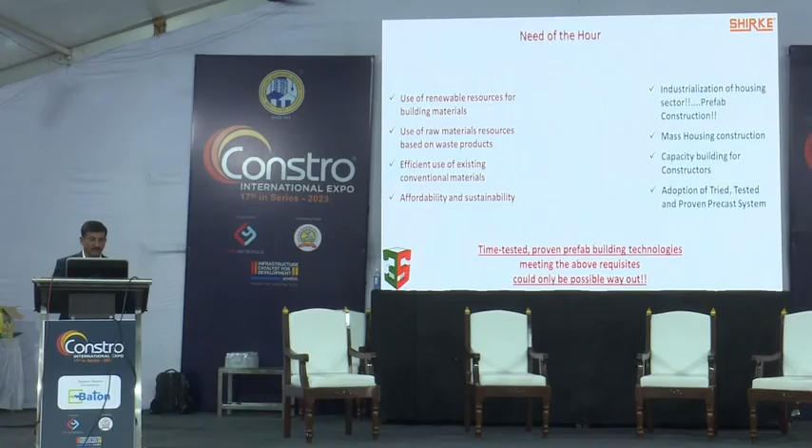What do we mean by prefab? It is something which is fabricated off-site and then assembled. Whereas in the precast scenario, we have something which is cast in molds and then taken to site. But we need to industrialize the housing sector when it comes to building construction. Mass housing is one such solution which will mitigate this particular shortage, and for that we need to do capacity building for our constructors and builders, so that we will be able to build maximum houses in this particular category in times to come.

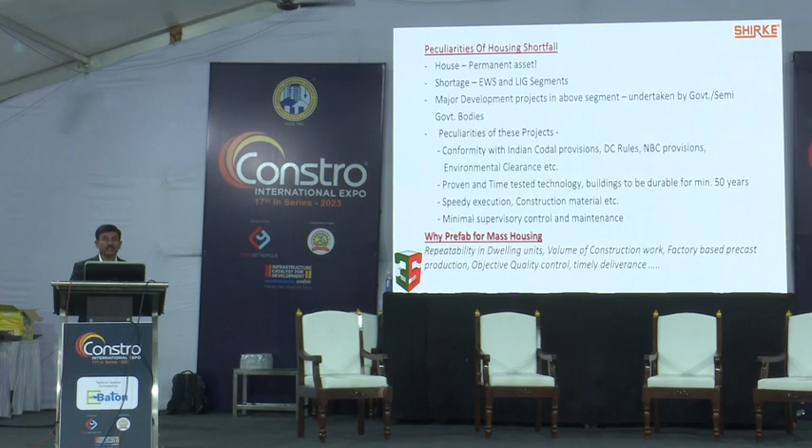House, as you know, is a permanent asset, and shortage lies predominantly in the EWS and LIG segments, based on precast manufacturing plants, objective quality controls in construction as well as precasting, and of course timely delivery. That brings me to the main question as to why precast, why not conventional construction? Yes, conventional construction does have its own importance, but when it comes to mitigating a shortage of 19 million houses in the shortest period of time, conventional construction won't help. We need some alternate technology. What is the alternate technology which is sustainable, tried, tested and proven in our context?

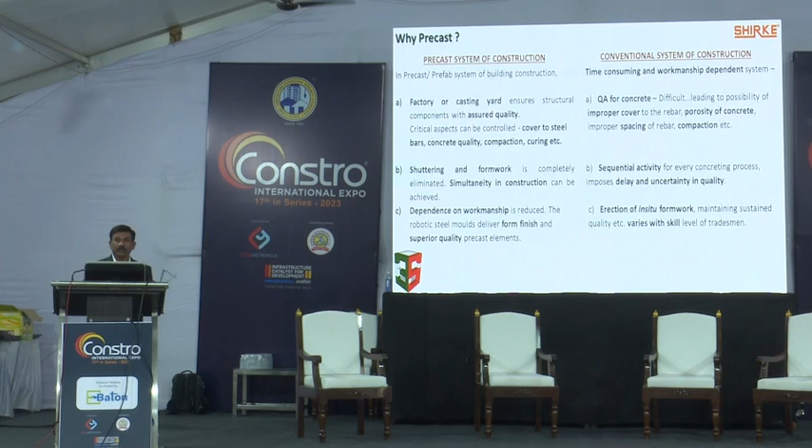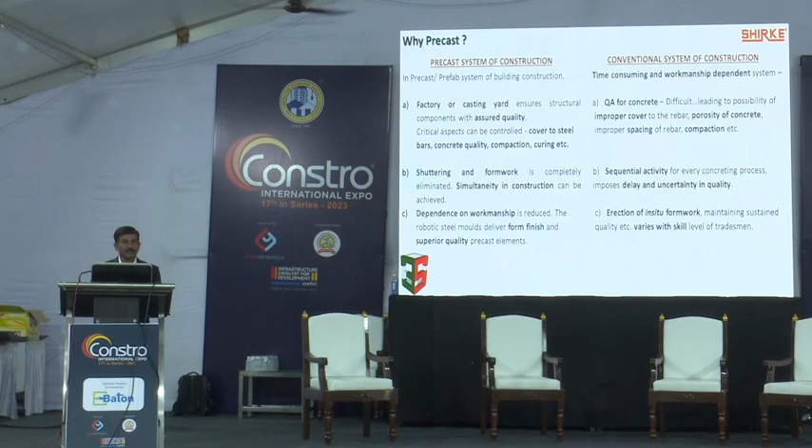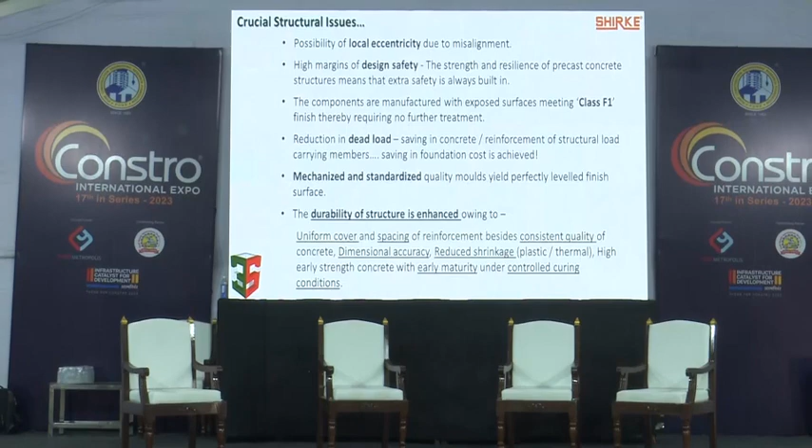It is prefab construction, wherein factory-based construction eliminates the dependence on human skills. Shuttering and formwork is entirely eliminated. Sequential activity as seen in conventional construction is eliminated. We can have the foundation started, and at the same time the casting of the superstructure can take place in the factories. These are some of the advantages: it reduces the entire structural load, makes the structure flexible, and behaves perfectly well in an earthquake scenario. Mechanized and standardized quality molds bring in objective quality controls.

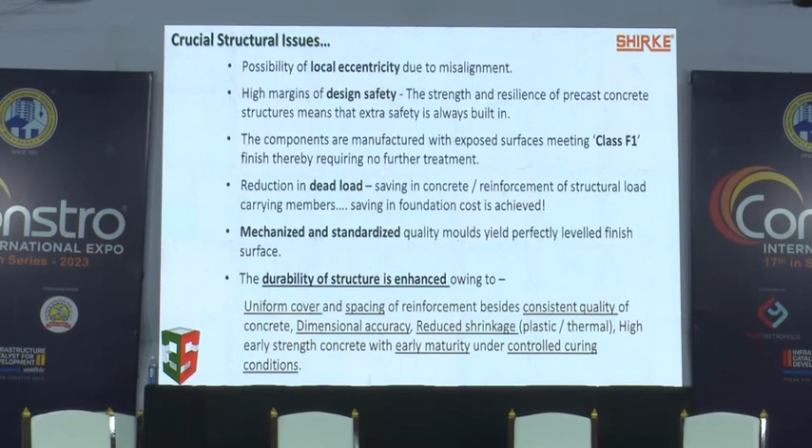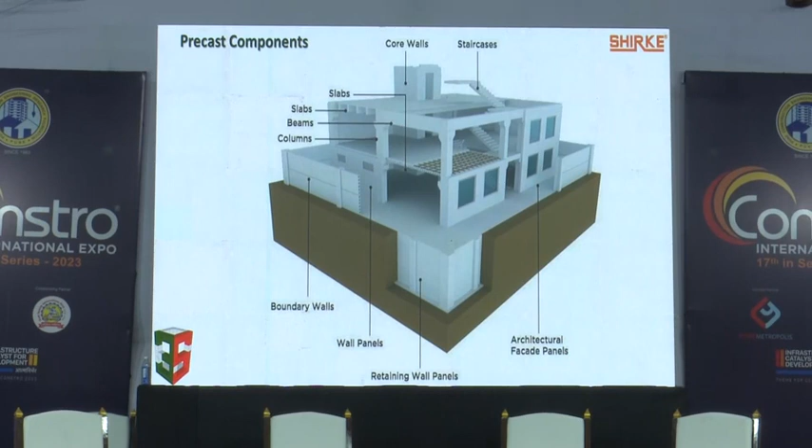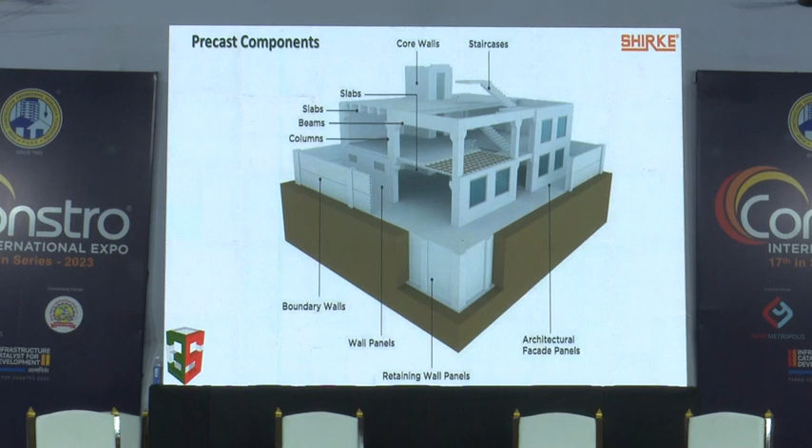What is more important is the last paragraph: uniformity in cover, spacing of reinforcement, consistent quality, dimensional accuracy. These are very important for structural members and their execution, along with early maturity, high strength, and controlled curing conditions, all possible with precast or prefab construction. As you can see in the photograph, any component used in housing construction can be precast today: foundations, retaining walls, columns, stem columns, plinth beams, floor beams, lift shafts, slabs, or even elevated tanks. All these can be precast and utilized.

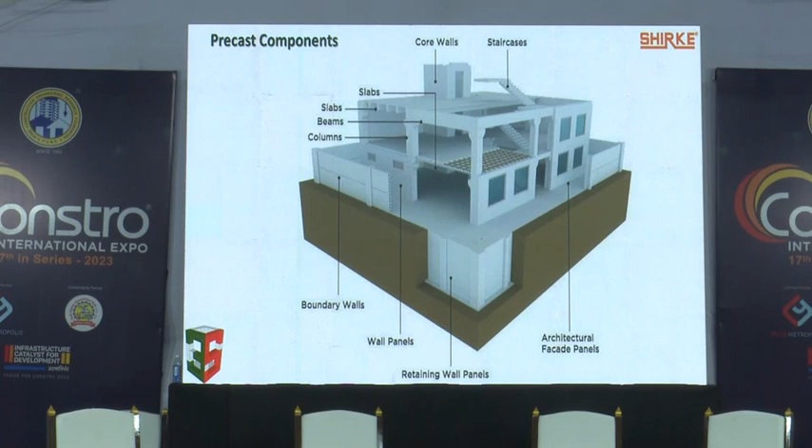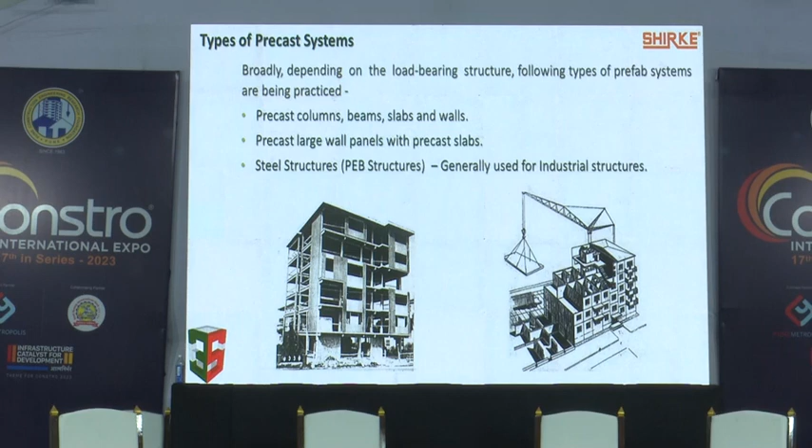Typically there are 3 types of precast systems that are prevalent. First is precast columns, beams, slabs and walls, and second is precast large panels with precast slabs, meaning large panel walls with slabs put on top. The jointing of columns, beams, slabs and walls is done monolithically. Third is of course steel structures, PEB structures, generally used for industrial purposes. The first photograph on the left is column, beam, slab and walls, and the second is wall and slabs.

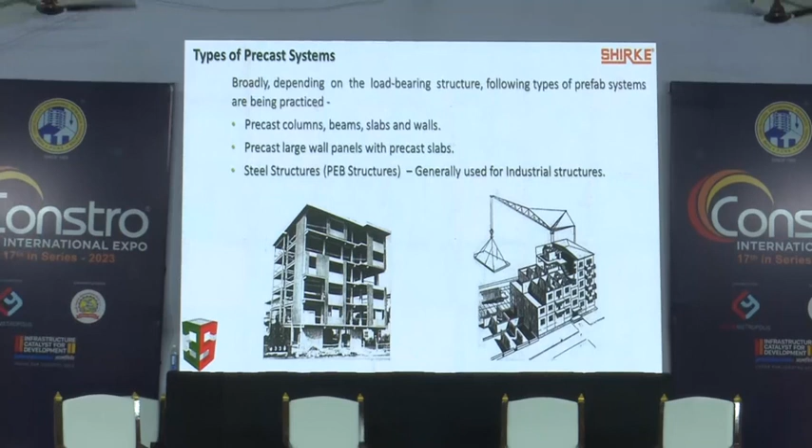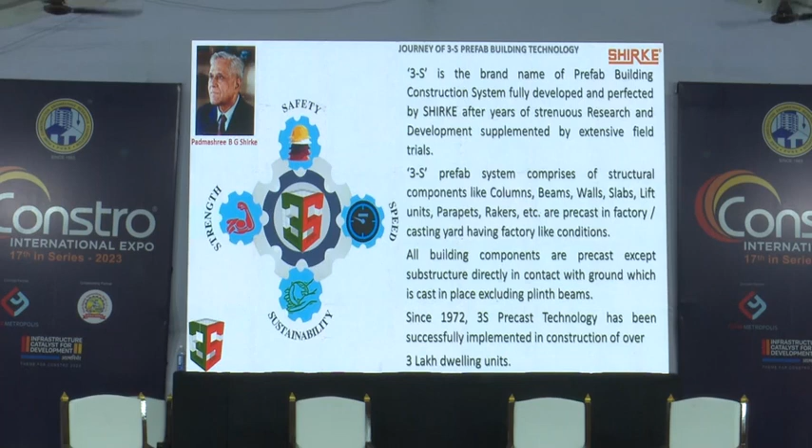What I am going to deliberate on today is the first, columns, beams, slabs and walls, popularly called 3S precast or 3S prefab technology. It was coined by our founder chairman Padma Shri B.G. Shirke way back in 1970, and thereafter we started executing projects using this technology. 3S stands for strength, speed and safety, along with sustainability. Ever since 1972, for the last 50 years plus, we have been executing projects with this technology, and believe me, there has not been a single incident of structural distress.

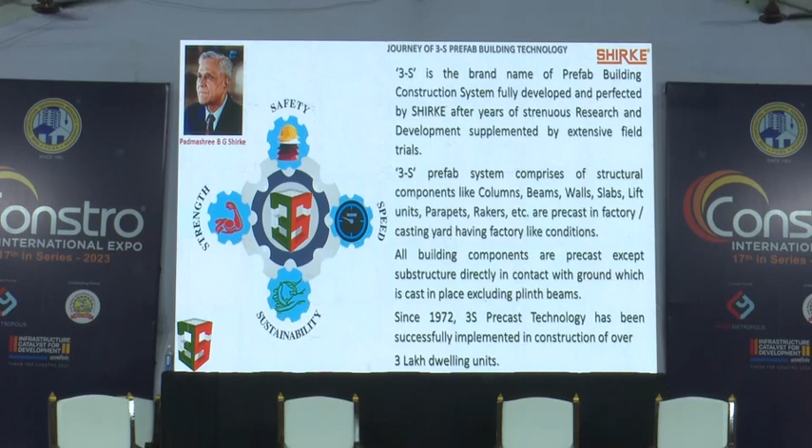I request Deshmukh sir to felicitate him.